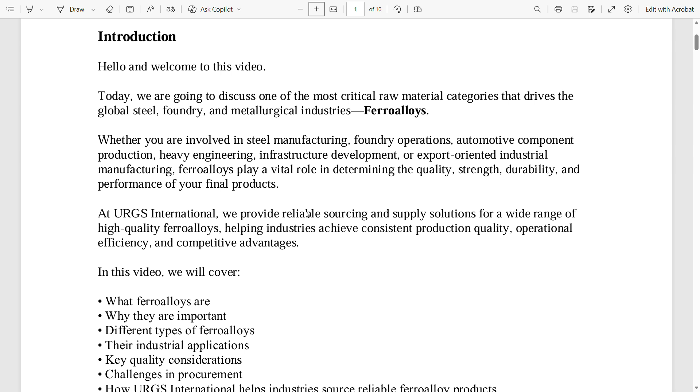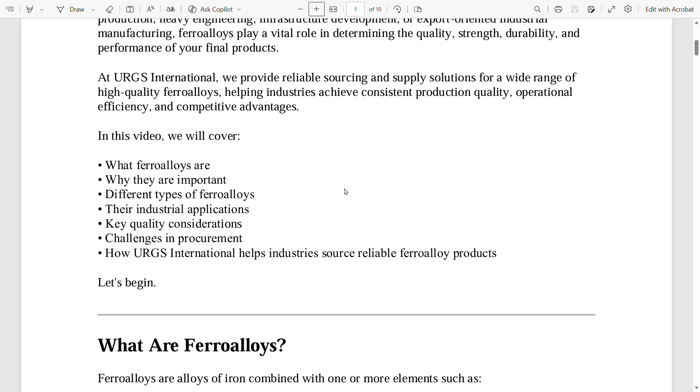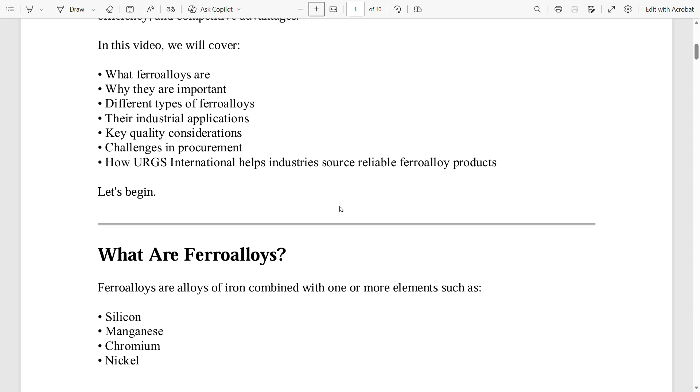In this video, we will cover what ferroalloys are, why they are important, different types of ferroalloys, their industrial applications, key quality considerations, challenges in procurement, and how URGS International helps industries source reliable ferroalloy products. Let us begin. What are ferroalloys?

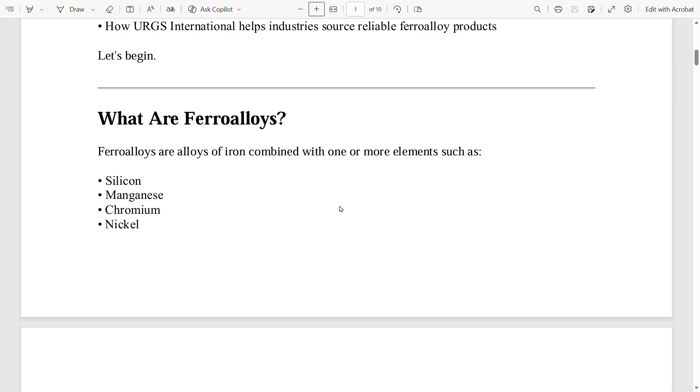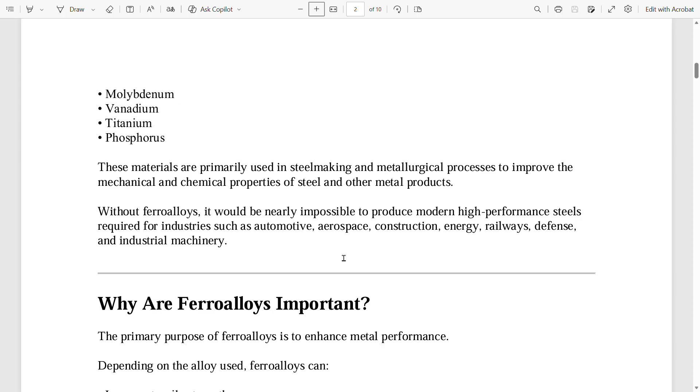Ferroalloys are alloys of iron combined with one or more elements such as silicon, manganese, chromium, nickel, molybdenum, vanadium, titanium, and phosphorus. These materials are primarily used in steel making and metallurgical processes to improve the mechanical and chemical properties of steel and other metal products.

Without ferroalloys, it would be nearly impossible to produce modern high-performance steels required for industries such as automotive, aerospace, construction, energy, railways, defense, and industrial machinery.

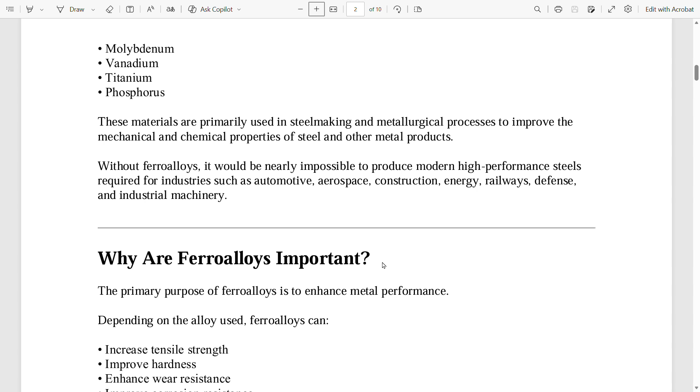Why are ferroalloys important? The primary purpose of ferroalloys is to enhance metal performance. Depending on the alloy used, ferroalloys can increase tensile strength, improve hardness, enhance wear resistance, improve corrosion resistance, increase heat resistance.

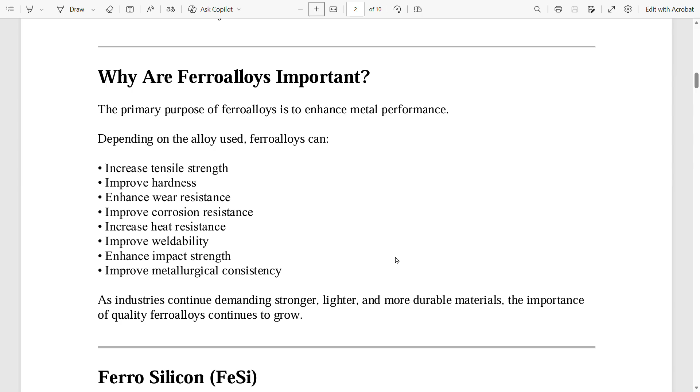Ferroalloys also improve weldability, enhance impact strength, and improve metallurgical consistency. As industries continue demanding stronger, lighter and more durable materials, the importance of quality ferroalloys continues to grow.

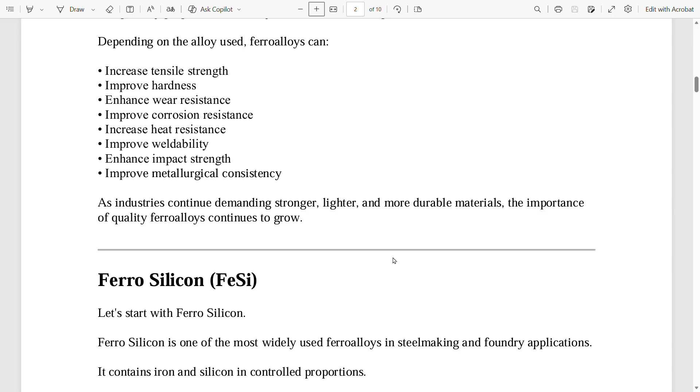Now let us see ferrosilicon. Ferrosilicon is one of the most widely used ferroalloys in steel making and foundry applications.

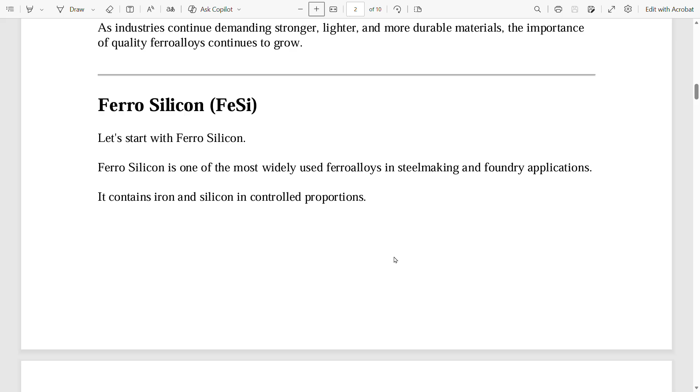It contains iron and silicon in controlled proportions. Key benefits: powerful deoxidizer in steel making, improves steel quality, enhances magnetic properties, reduces oxygen content during production, improves casting quality.

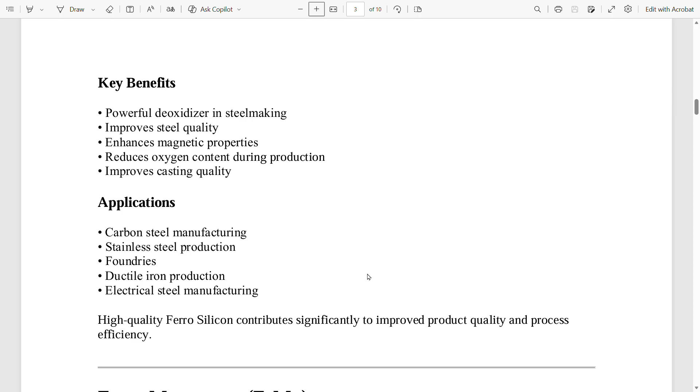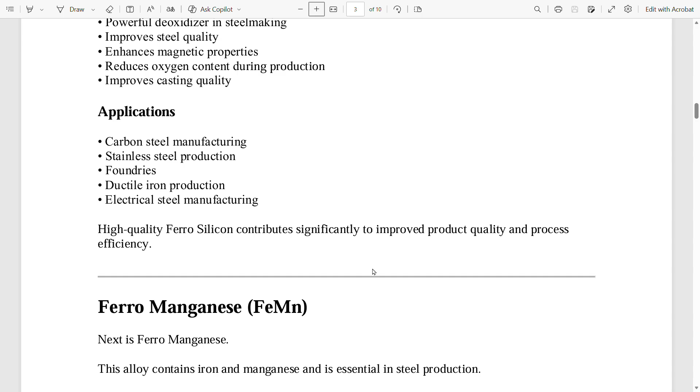Applications: carbon steel manufacturing, stainless steel production, foundries, ductile iron production, electrical steel manufacturing. High quality ferrosilicon contributes significantly to improved product quality and process efficiency.

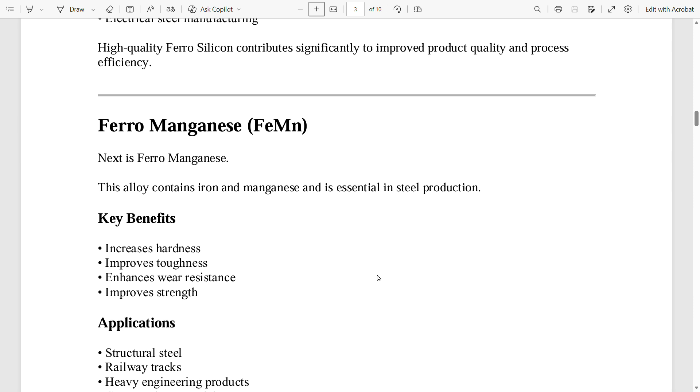Now ferromanganese, FeMn. This alloy contains iron and manganese and is essential in steel production. Key benefits: increase hardness, improve toughness, enhance wear resistance, improve strength.

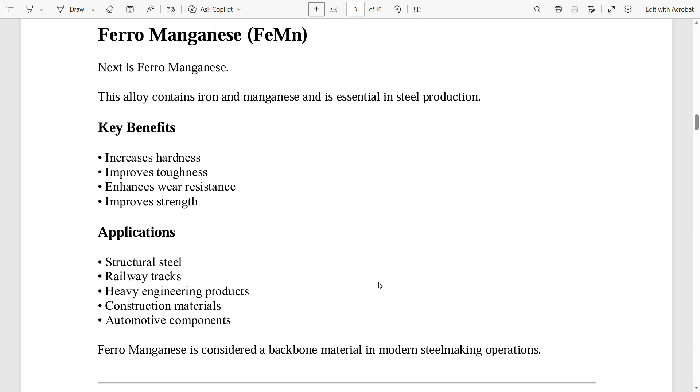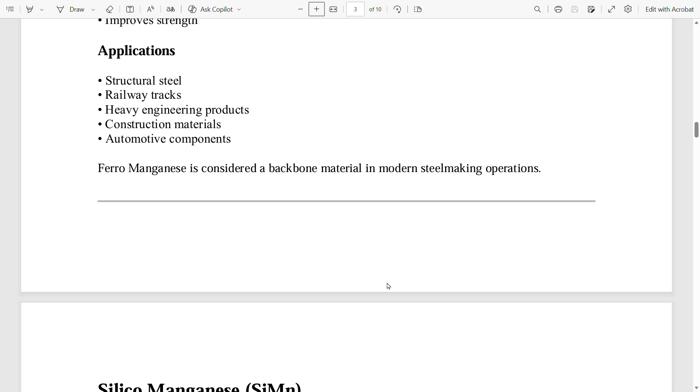Applications: structural steel, railway tracks, heavy engineering products, construction materials, automotive components. Ferromanganese is considered a backbone material in modern steel making operations.

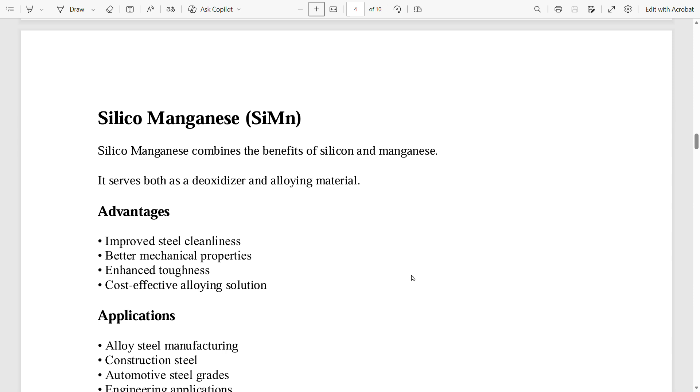Now silicomanganese, SiMn. Silicomanganese combines the benefits of silicon and manganese. It serves both as a deoxidizer and alloying material.

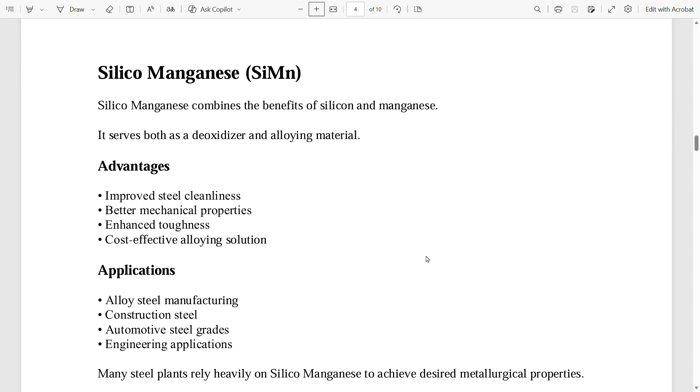Advantages: improved steel cleanliness, better mechanical properties, enhanced toughness, cost-effective alloying solution.

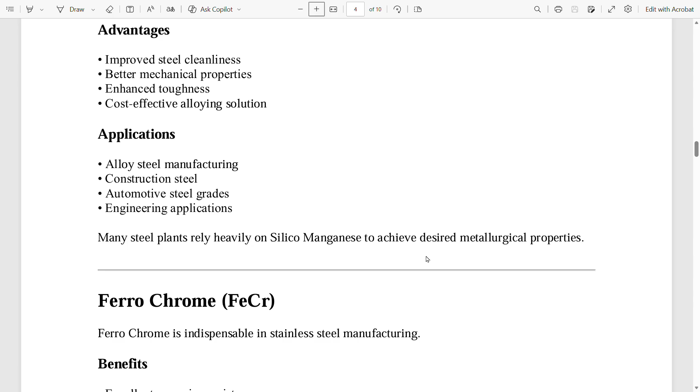Applications: alloy steel manufacturing, construction steel, automotive steel grades, engineering applications. Many steel plants rely heavily on silicomanganese to achieve desired metallurgical properties.

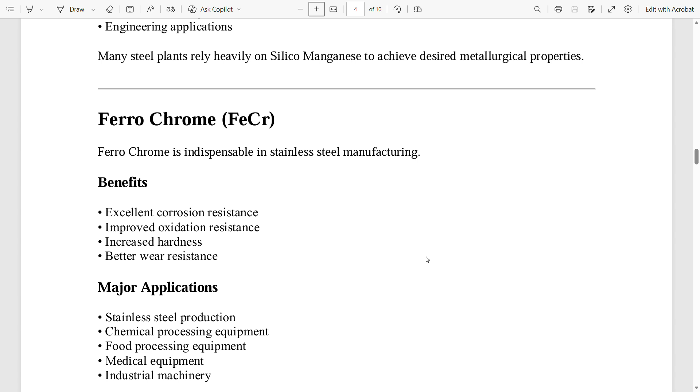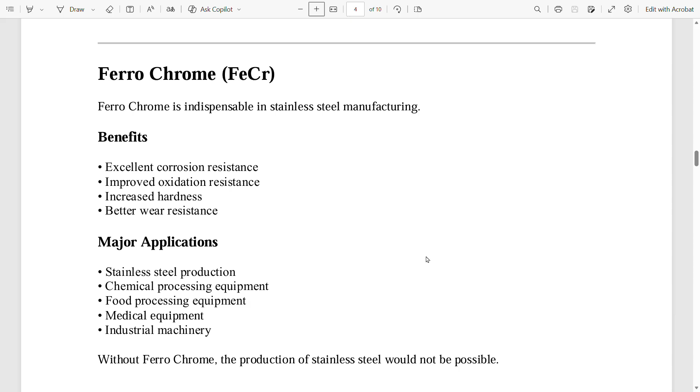Ferrochrome, FeCr. Ferrochrome is indispensable in stainless steel manufacturing. Benefits: excellent corrosion resistance, improved oxidation resistance, increased hardness, better wear resistance. Major applications: stainless steel production, chemical processing equipment.

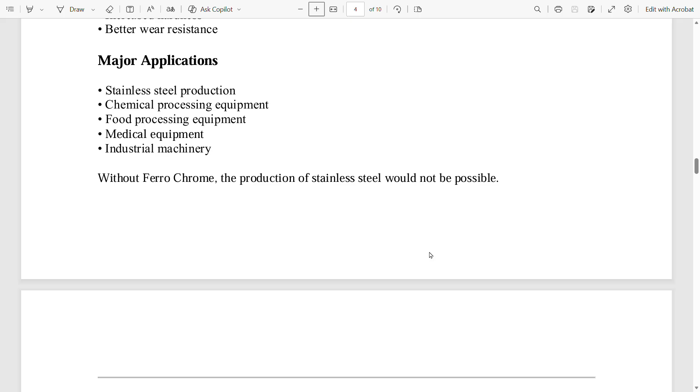Also used in food processing equipment, medical equipment, and industrial machinery. Without ferrochrome, the production of stainless steel would not be possible.

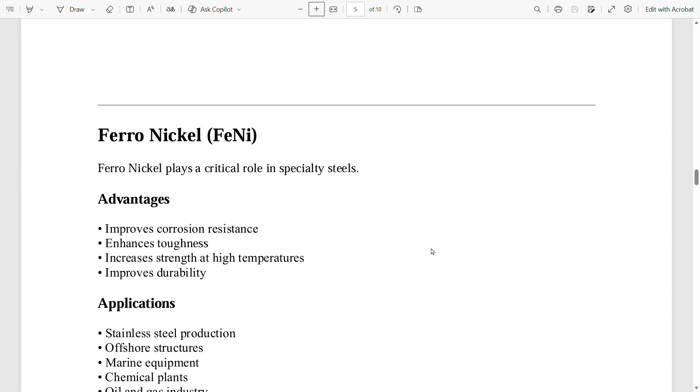Ferronickel, FeNi. Ferronickel plays a critical role in specialty steels. Advantages: improves corrosion resistance, enhances toughness, increases strength at high temperatures, improves durability.

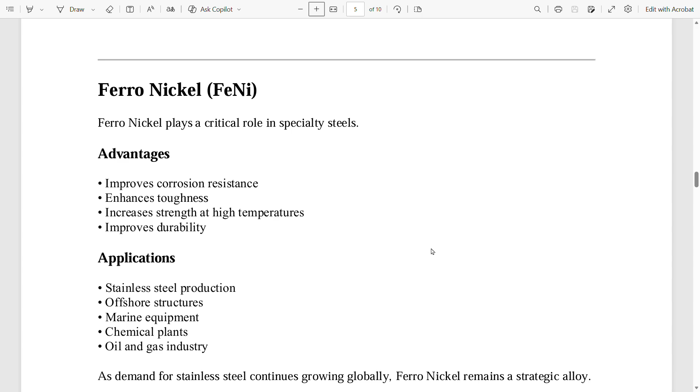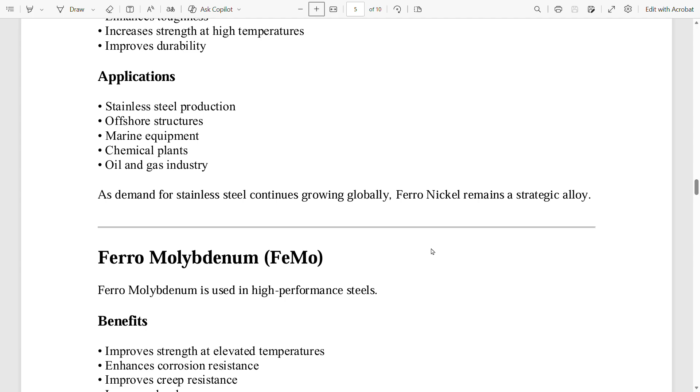Applications: stainless steel production, offshore structures, marine equipment, chemical plants, oil and gas industry. As demand for stainless steel continues growing globally, ferronickel remains a strategic alloy.

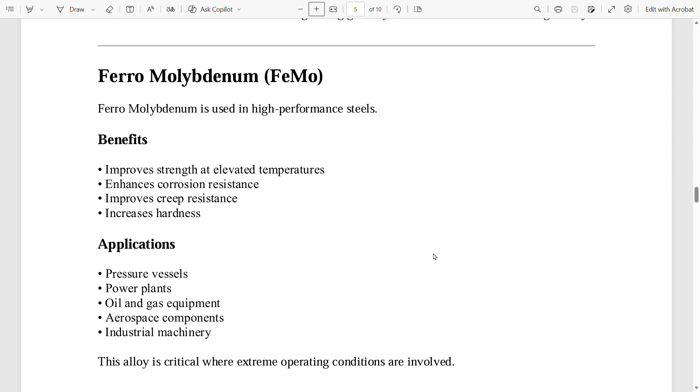Now, ferromolybdenum, FeMo. Ferromolybdenum is used in high performance steels. Benefits: improves strength at elevated temperatures, enhances corrosion resistance, improves creep resistance, increases hardness.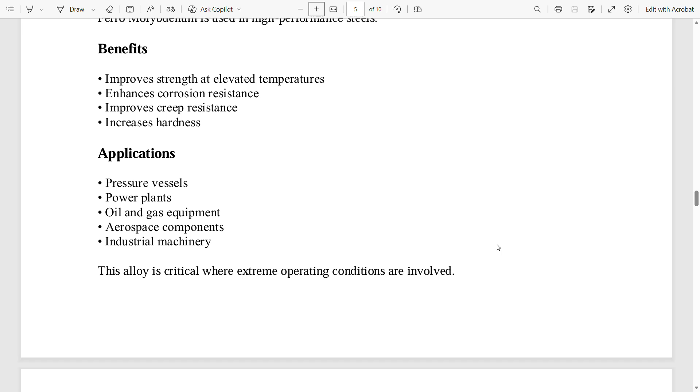Applications: pressure vessels, power plants, oil and gas equipment, aerospace components, industrial machinery. This alloy is critical where extreme operating conditions are involved.

Ferrovanadium, FeV. Ferrovanadium significantly improves steel strength. Advantages: higher tensile strength, improved toughness, grain refinement, better fatigue resistance.

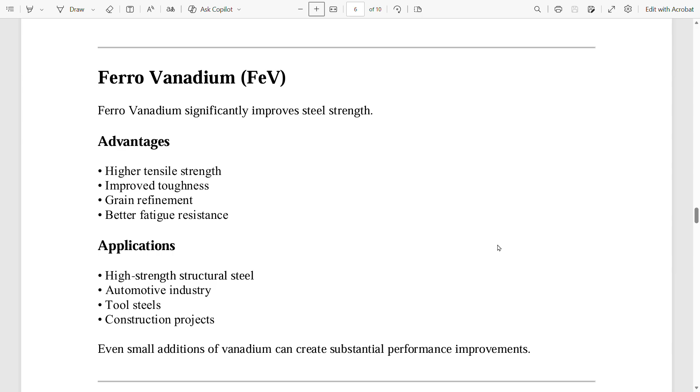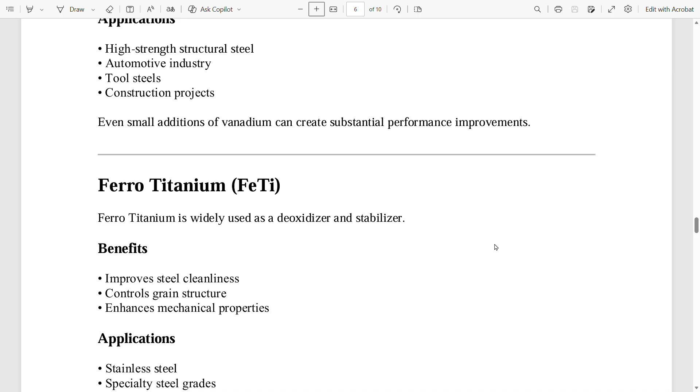Applications: high strength structural steel, automotive industry, tool steels, construction projects. Even small additions of vanadium can create substantial performance improvements.

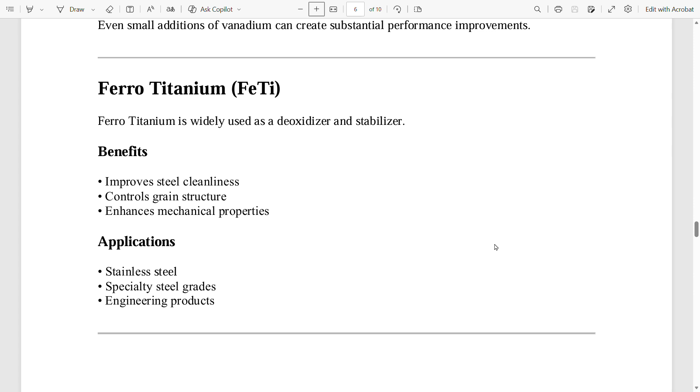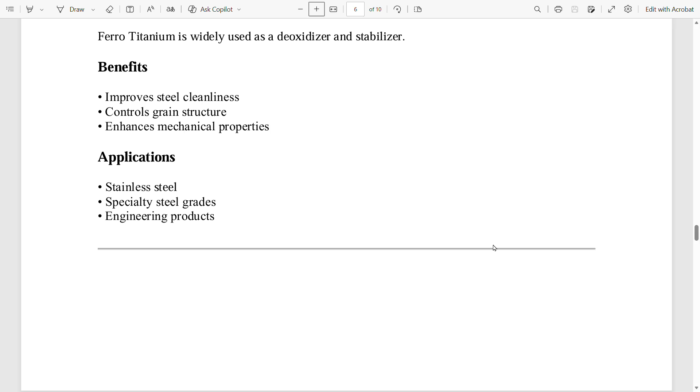Ferrotitanium is widely used as a deoxidizer and stabilizer. Benefits: improves steel cleanliness, controls grain structure, enhances mechanical properties. Applications: stainless steel, specialty steel grades, engineering products.

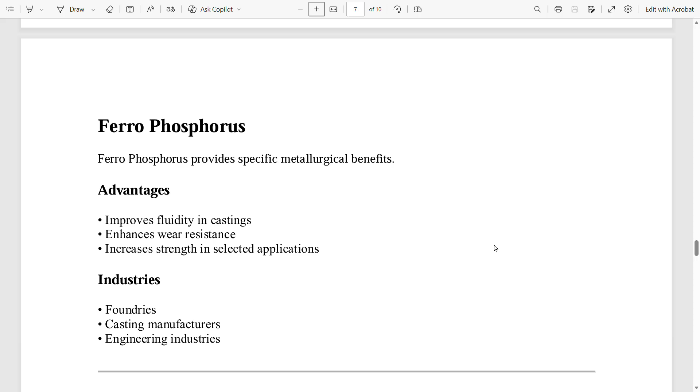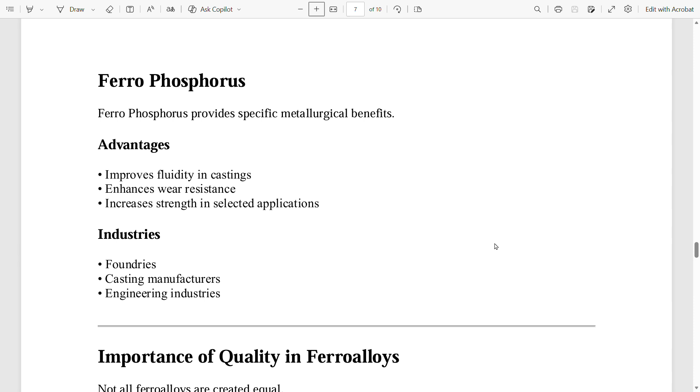Ferrophosphorus provides specific metallurgical benefits. Advantages: improves fluidity in castings, enhances wear resistance, increases strength in selected applications. Industries: foundries, casting manufacturers, engineering industries.

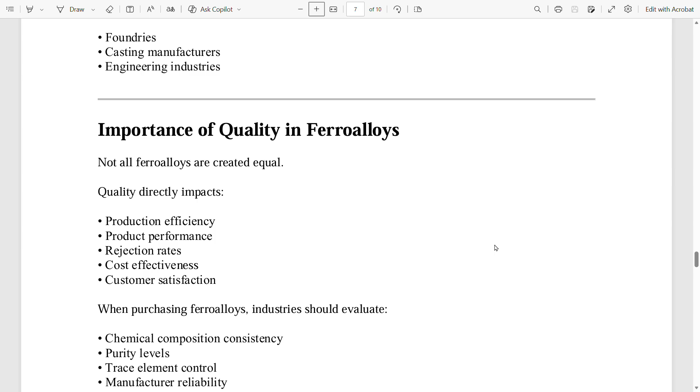Now, the importance of quality in ferroalloys. Not all ferroalloys are created equal. Quality directly impacts production efficiency, product performance, rejection rates, cost effectiveness, and customer satisfaction.

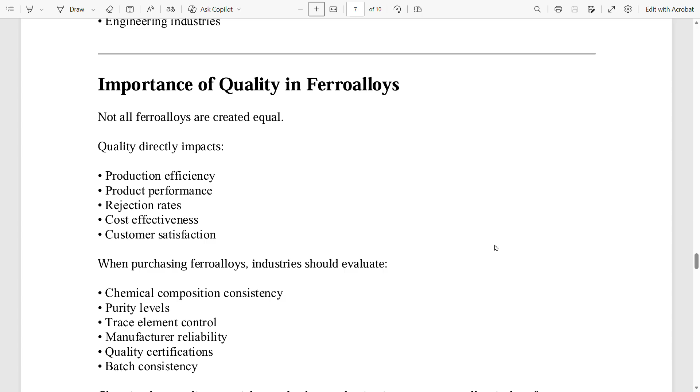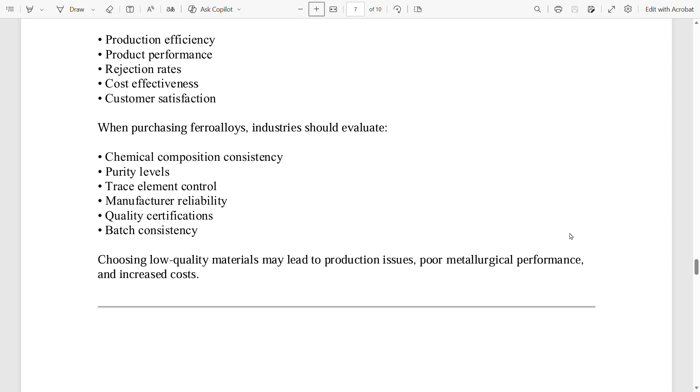When purchasing ferroalloys, industries should evaluate chemical composition consistency, purity levels, trace element control, manufacturer reliability, quality certifications, and batch consistency. Choosing low quality materials may lead to production issues, poor metallurgical performance, and increased costs.

Now, procurement challenges faced by industries. Many industries face common sourcing challenges: price volatility, supply chain disruptions, inconsistent quality, delivery delays, limited supplier options, and technical support gaps. These challenges can significantly impact production schedules and profitability. This is where a reliable sourcing partner becomes valuable.

Why industries choose URGS International? At URGS International, we understand the technical and commercial challenges associated with industrial raw material procurement. Our goal is simple: to provide reliable, cost-effective, and quality-focused ferroalloy supply solutions.

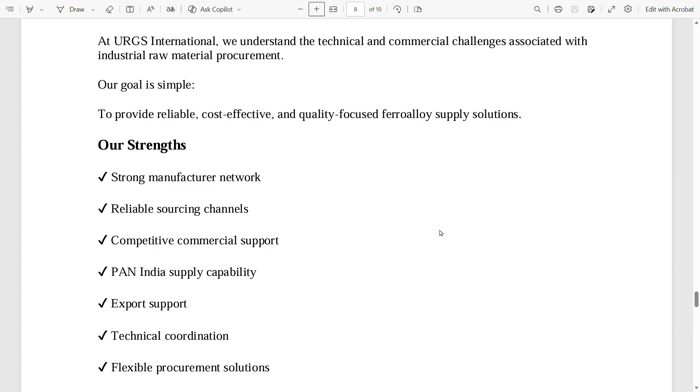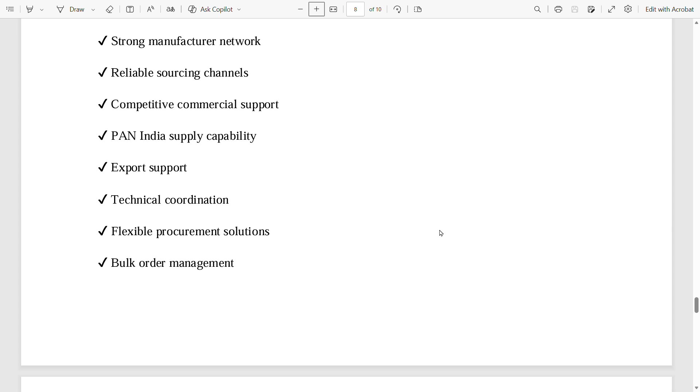Our strengths: strong manufacturer network, reliable sourcing channels, competitive commercial support, pan-India supply capability, export support, technical coordination, flexible procurement solutions, bulk order management, and industrial grade quality assurance.

Industries we serve: our ferroalloy solutions support the steel industry, providing alloying materials for carbon steel, alloy steel, and stainless steel production. Foundries supporting iron and steel casting operations. Automotive industry helping manufacturers produce high strength components.

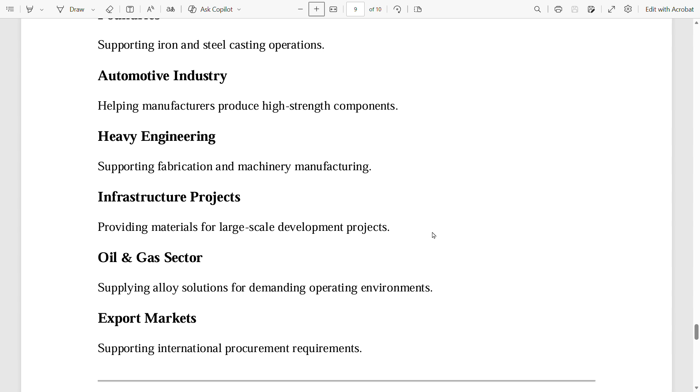Heavy engineering supporting fabrication and machinery manufacturing. Infrastructure projects providing materials for large scale development projects. Oil and gas sector supplying alloy solutions for demanding operating environments. Export markets supporting international procurement requirements.

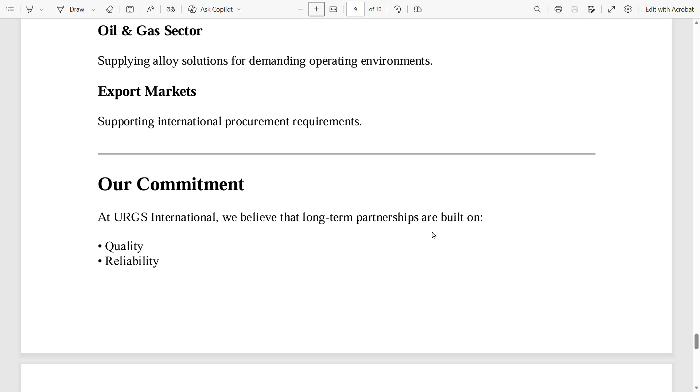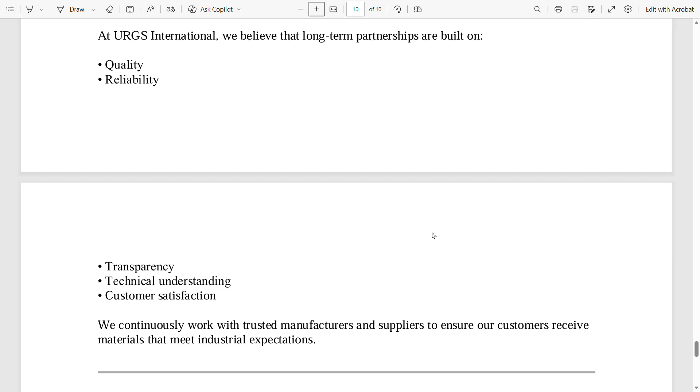Our commitment at URGS International: we believe that long-term partnerships are built on quality, reliability, transparency, technical understanding, and customer satisfaction. We continuously work with trusted manufacturers and suppliers to ensure our customers receive materials that meet industrial expectations.

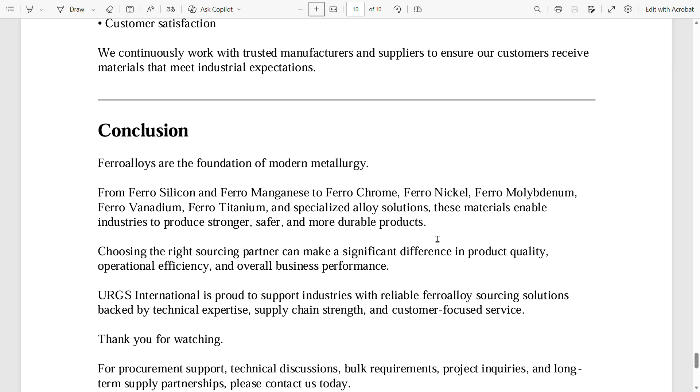In conclusion, ferroalloys are the foundation of modern metallurgy, from ferrosilicon and ferromanganese to ferrochrome, ferronickel, ferromolybdenum, ferrovanadium, ferrotitanium, and specialized alloy solutions.

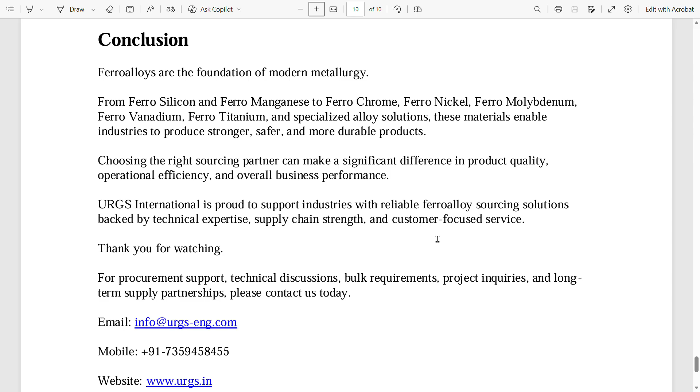These materials enable industries to produce stronger, safer, and more durable products. Choosing the right sourcing partner can make a significant difference in product quality, operational efficiency, and overall business performance.

URGS International is proud to support industries with reliable ferroalloy sourcing solutions backed by technical expertise, supply chain strength, and customer focused service.